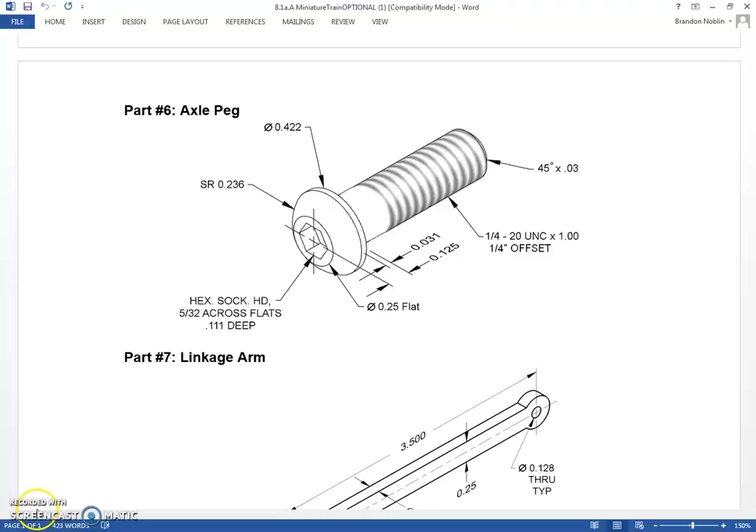Alright, this is going to be the last video that covers any modeling for the miniature train project. The linkage arm you should be able to handle. It's a single sketch, single extrusion. The linkage peg is going to be done exactly like the hitch peg in a prior video, so you should

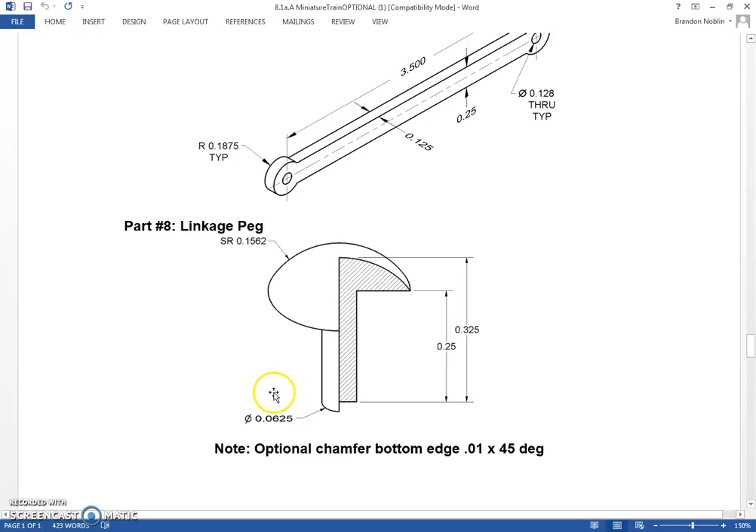be good on those. But this cow catcher is probably going to be the most challenging part of all the parts in the miniature train, simply because you're going to be learning a few different commands with the creation of the cow catcher. We're going to talk about lofting, we're going to talk about a shell, offset command, a couple

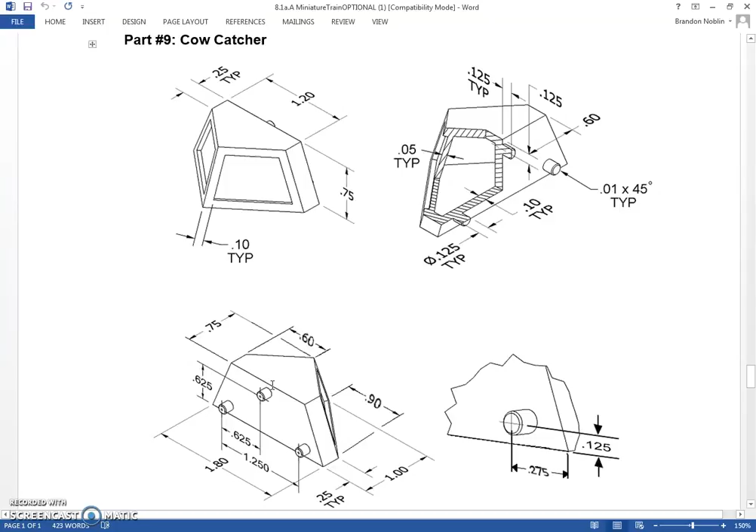other things. So what I'm going to do is start with basically the bottom of this part. I'm going to draw this kind of five-sided polygon here first. So this width is 1.8. The overall height, from the bottom edge to this point, is 1 inch. From the left side to the point is 0.9. And then I believe these flats on all of the sides here are 1/4 inch.

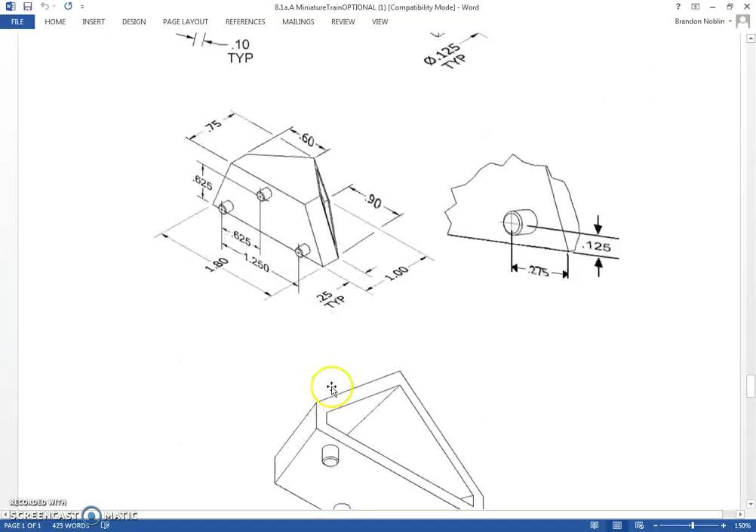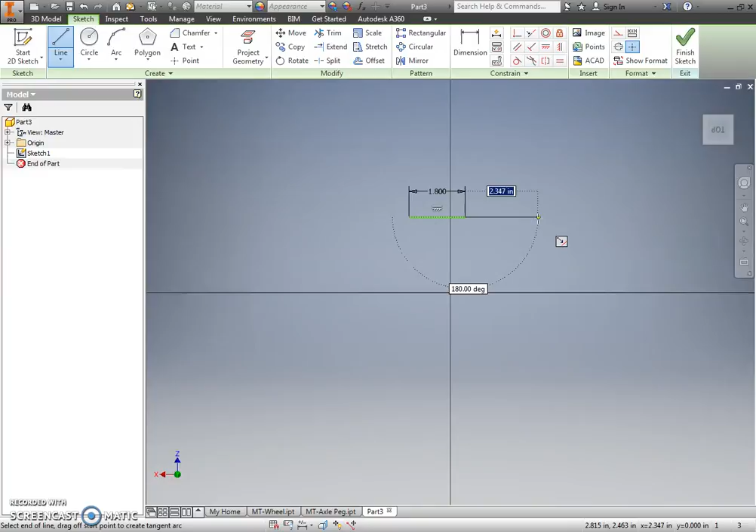So when I come into Inventor and I create my sketch, I am going to attempt to create this sketch keeping the orientation in mind. So I'm going to do this a little bit different than normal. I'm going to sketch by dimensioning as I go, but then also simultaneously not dimensioning as I go. So I'm going to come in here, create this. This should be 1 inch, I believe.

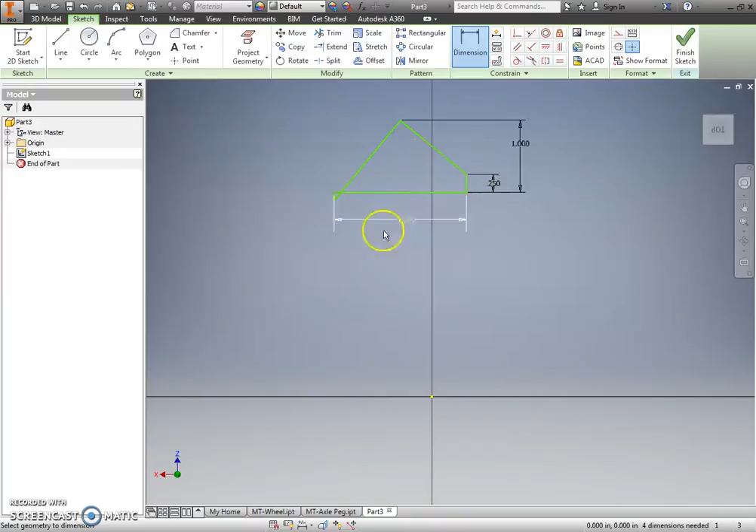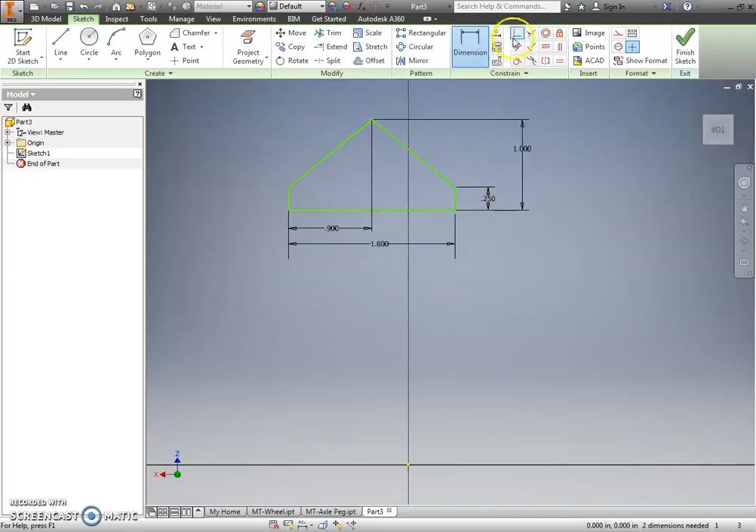Notice that got all screwed up. Not too concerned about it. I'm just going to make it move. I'm going to try to do an equal constraint on that length to that one and see if it lets me. It does. And apply that. So the reason I did it this way is now I want to come back and make a coincident constraint of that midpoint to my origin, because I want this to be centered in my XY plane.

So I'm going to finish that sketch, and this is where it's going to start to get a little bit more challenging. In my browser, I need to turn on the visibility for that plane that I just created. We've already talked about work planes in the train body, but now I need to build another work plane above this plane and parallel to it so that I can create basically the same sketch that I just did, except with the measurements for the top.

So the top is 0.75 inches tall, 1.2 across the back, still 1/4 inch on the sides, and that overall height is 0.75. So in Inventor, I'm going to go to my plane tool. I'm going to click and hold on this plane, dragging up, and then specifying 0.75 inches, which was the height of

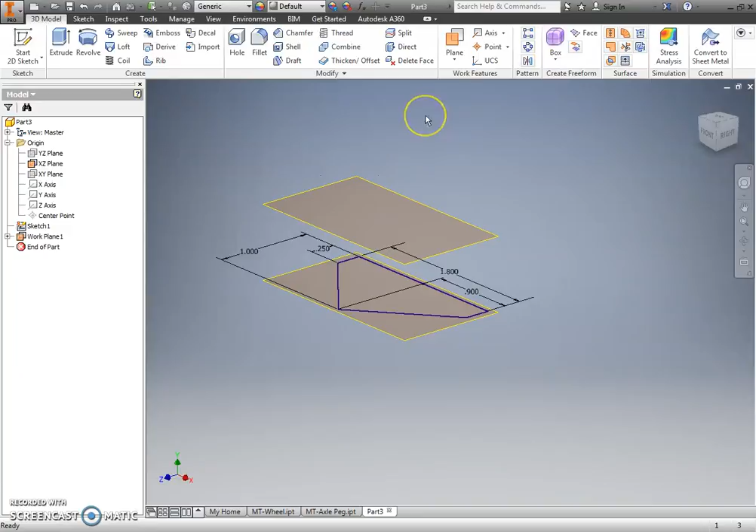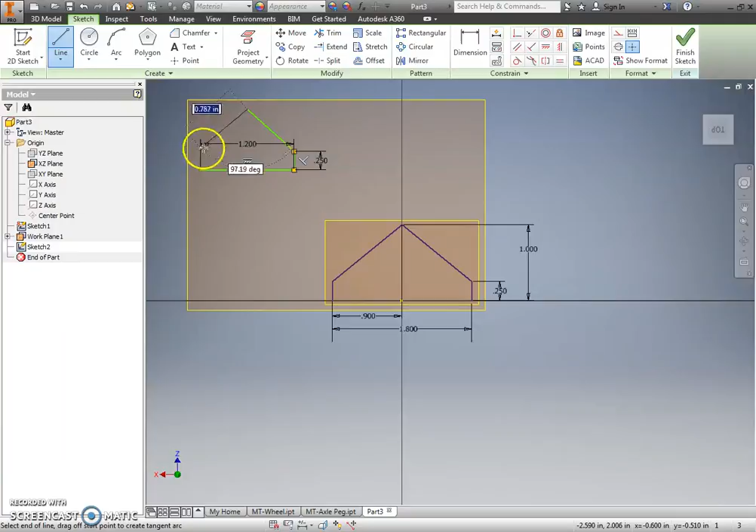this part. So I'm going to create this sketch on here, and again, I'm going to draw off in space over here and dimension as I'm drawing. It was 1.2, 0.25, and then links all back up.

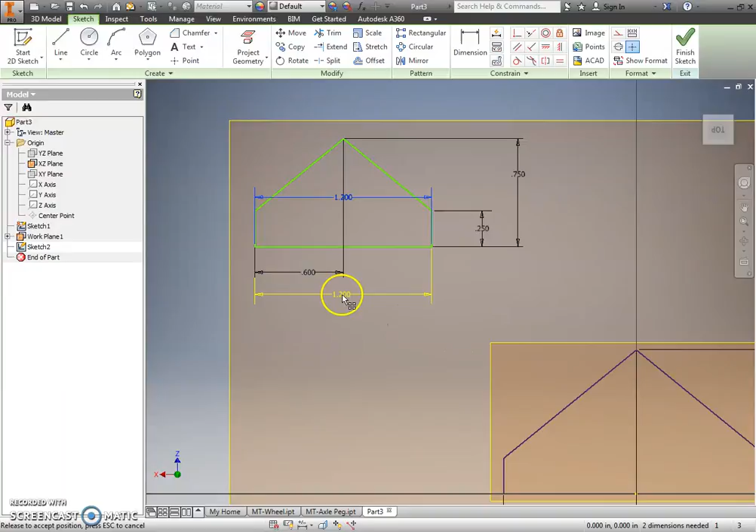So using that coincident constraint and making sure that we're locking to the center point, the origin, or whatever plane that happens to be, which I believe is the YZ plane and the XY plane, where they meet, using that origin as a reference, is the only way we're going to be able to do this. So I'm going to finish my sketch.

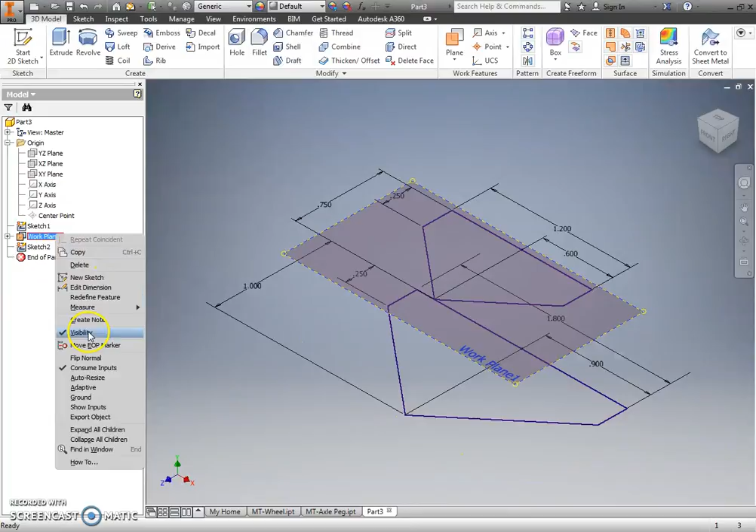These work planes, I'm going to turn the visibility back off of, so it's a little bit easier for you to see what I'm doing. But you can see that those sketches are on two different levels.

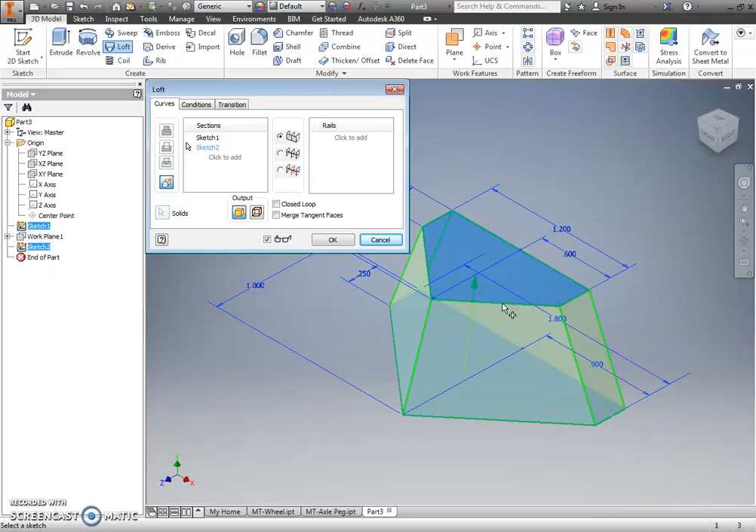Okay, and what I do here is I'm now choosing my Loft command, and what the Loft does is it takes geometry, and when I click those two pieces of geometry, it makes it a solid in between them, and it follows whatever path it needs to follow in order to do that. So really creating the sketches is the difficult part of doing what we've done so far. The Loft is simply click the two options.

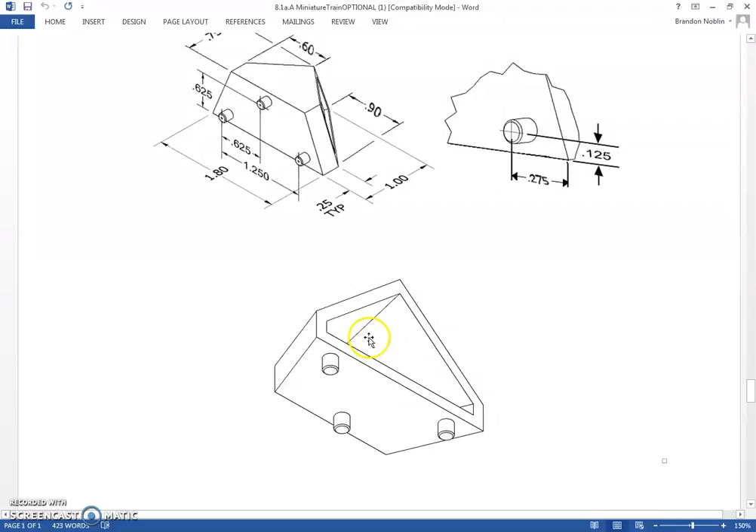Okay. The next command I'm going to show you is the shell command. What the shell command does is, if you notice, this part is hollow on the inside, and this provides us a little section view, and it tells us that it's hollow to a thickness of 0.10.

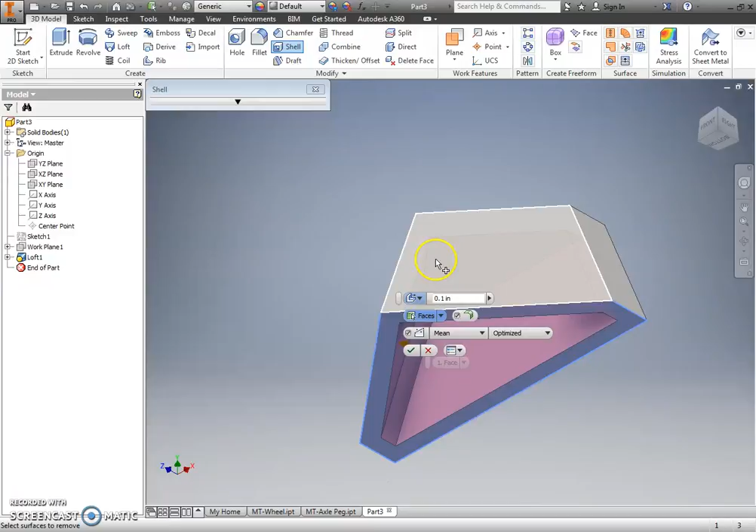So what I'm doing here with the shell command is I'm going to say shell, and it's a modify command, and I'm simply going to click on the bottom of the part, and that lets me know that that's where the shell is entering my part, and it's simply leaving this thickness all the way around the part. So you can see now that that part is hollow. Okay, and then that's a new command as well. So we've done Loft, we've done shell.

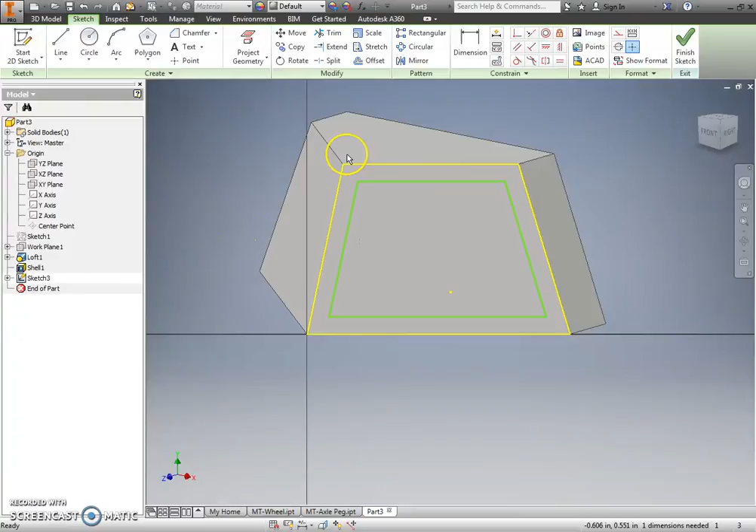The other command that I'll show you is if I come here and create a sketch on this front face, I am going to project geometry. I want to see this edge. Okay, offset allows me to take an existing set of geometry and make it larger or smaller, but keeping the same angles and thicknesses and sizes. And then I can simply specify the thickness or the offset that I want it to be. And I'm kind of doing that from memory.

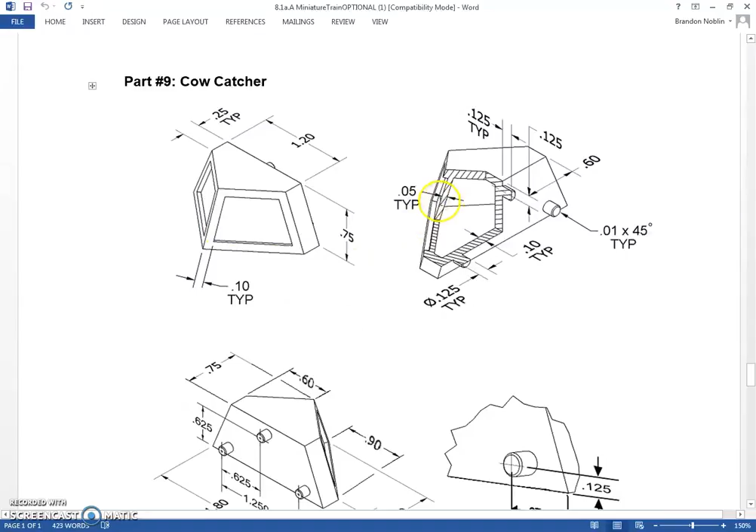But if you look right here, 0.10, so this gets offset 0.10, then it's going to get extrude cut to leave 0.05. So come in here, I'm going to say extrude. Alright, maybe look at it from a different angle here. Extrude cut 0.05, and we got that. Alright, so I'm going to do the same thing on the other side.

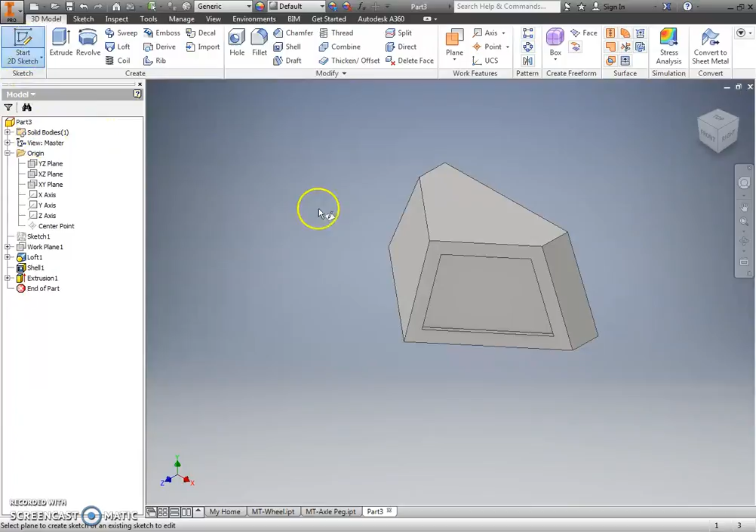Project geometry, offset the geometry, dimension it to be 0.1, extrude cut 0.05, and that creates that.

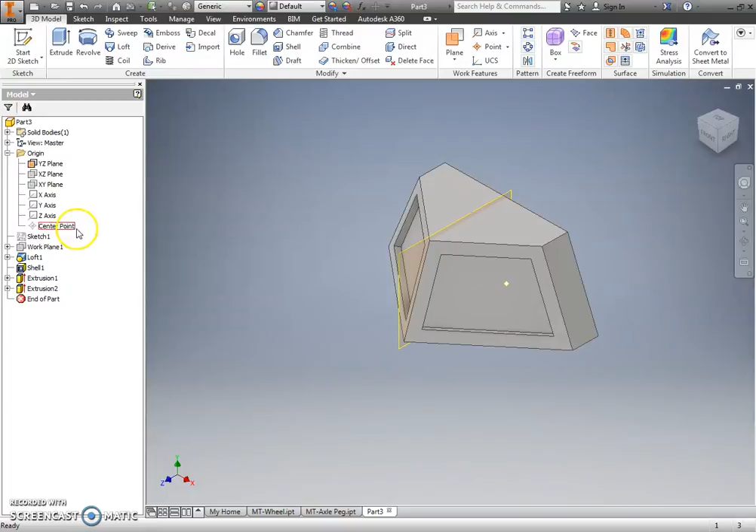That last part, I might have been able to open up my YZ plane, which cuts directly through the part, and mirror this feature to the other side. It might have worked, but you saw how quickly I could just create a sketch, project geometry, offset it, and just extrude cut it. So I kind of did that on my own, just because, again, I feel like it's just as quick sometimes to create the sketch and do the geometry.

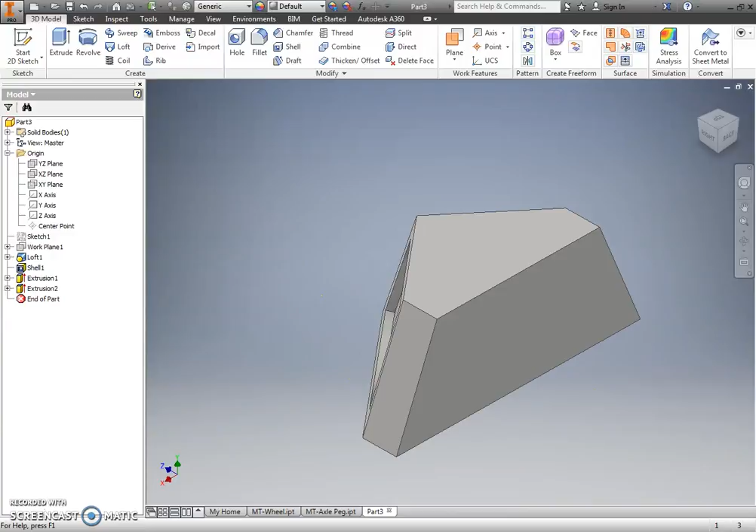To finish this part, we just need to add our 3 pegs off the back. So it's just going to be 3 circles, fully constrained, linked to where they need to be linked, and extruded out the distance they need to be extruded out. I'm going to leave that up to you. That shouldn't be something we have to show, but our next video is going to actually take all the parts we've created and start putting them together.